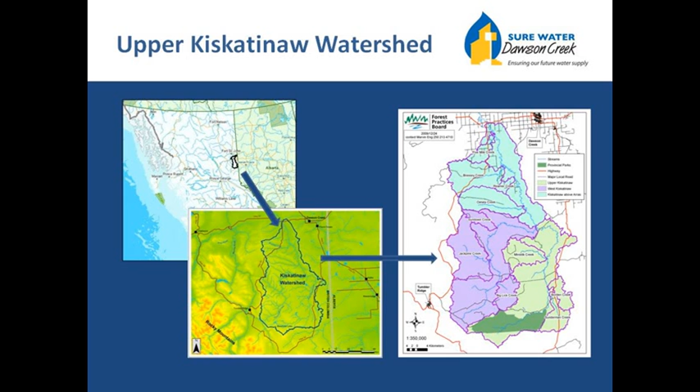The watershed is broken up into 3 key subbasins: the East Kiskatinaw River, the West Kiskatinaw River, and the Middle Kiskatinaw River. At its headwaters, we have Bear Hole Lake, which is a large protected area. From there, water flows through the East Kiskatinaw River system and eventually reaches the Arras Weir, approximately 170 kilometers downstream, from where we take water from the river through a series of stepped reservoirs and into the water treatment plant, which is a level 4 treatment to deal with any issues related to bacteria and parasites.

Once the water is treated and proceeds through the distribution system of the city, it ends up at the lagoon system near the airport, where it is further treated. And a unique initiative which has been brought on over the past several years is development of a wastewater reclamation facility, a world-class facility to promote the use of wastewater for industrial purposes and other eventual public use purposes. Once the water is treated through that system, it will eventually be discharged back to the Pouce-Coupe River and into the Peace River.

The City of Dawson Creek has really taken on an interesting approach to water management through an integrated approach. The Integrated Watershed Stewardship Program is an integrated water approach that brings in source water, treatment, distribution, waste treatment, and reclamation. When we look at the watershed component itself, we're emphasizing 3 components: community outreach, research and monitoring, planning and policy. This is done to ensure that the public is fully aware of how it can reduce its water footprint through conservation, engaging various industry and government partners in researching how water and land is being managed within the watershed, and also looking at broader policy and government regulations to ensure that we are protecting drinking water.

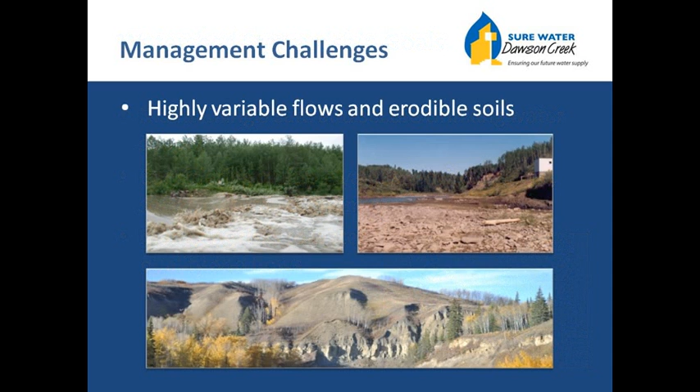So we deal with turbidity issues through improved land management practices, and there are plenty of safeguards to ensure that any wells or waste developments within the watershed are carefully managed, protected, and monitored.

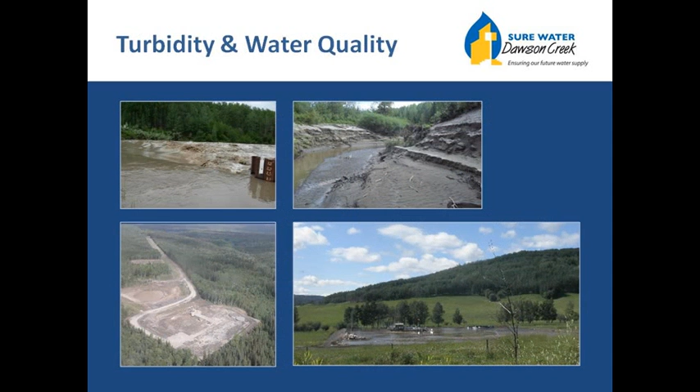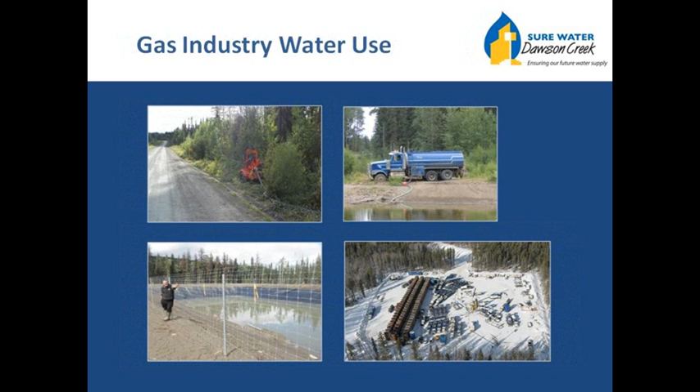So we continue to have a role in overseeing the monitoring of that activity. As we've seen over the years, the gas industry has had a significant demand for water, but in fact, reports are showing that it represents a very tiny fraction of use of the available basin flows, and in fact is decreasing over the years. So we continue to look at all water users and land management in an integrated approach to ensure that we understand the limits of our water resources and how we can continue to manage for improved water supply and quality.

So going forward into the future, we want to build on our efforts to maintain water conservation and source water protection, put more effort into classifying and protecting groundwater or aquifer supplies, studying and protecting wetlands, which we know are really important for storage during periods of drought. Establishing a formal watershed advisory body will help us to coordinate our efforts among water resource users and various industry partners. Through designation of the watershed, we believe we can have a greater focus on implementing our source water protection plan.

And finally, during periods of low flow or drought, as we've seen in 2011, the Bear Hole Lake water supply is proving to be a very reliable source, which we will need to continue to manage and ensure its sustained use. So Kevin, that's an overview of the watershed program. Let's hear more about how we can continue to maintain our water supply through various options.

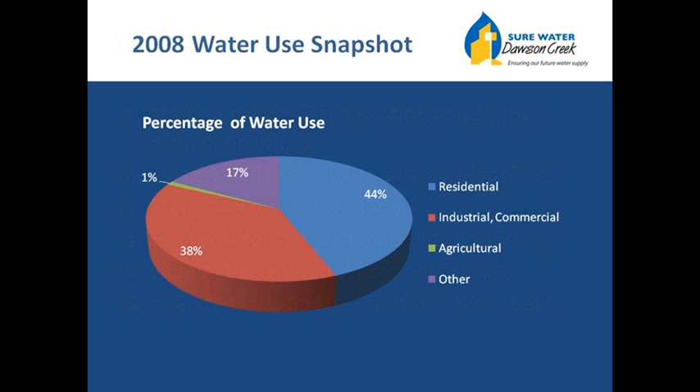These options have been studied over the years, with the majority of efforts focused on increasing our storage capacity by building more water reservoirs. However, more recently, a group of local citizens proposed a new water pipeline to Council, and Council felt the idea had some merit. And as a result, it was decided with the group that this information would be shared with the community in a public forum that looked at all the options.

Before making decisions regarding these costly enhancements, Council and staff want to know how water users feel about the existing options and other alternatives. Hence our campaign today to provide you with the information about these options and find out your preference. Please note that no action would be undertaken without community approval through a referendum or alternative approval process.

So here are the 4 options. Upgrading the existing water supply system as needed. Building a new raw water reservoir, tapping into groundwater aquifers, building a new water pipeline. We are also open to other ideas and options worth exploring. Now let's have a closer look at each one of these.

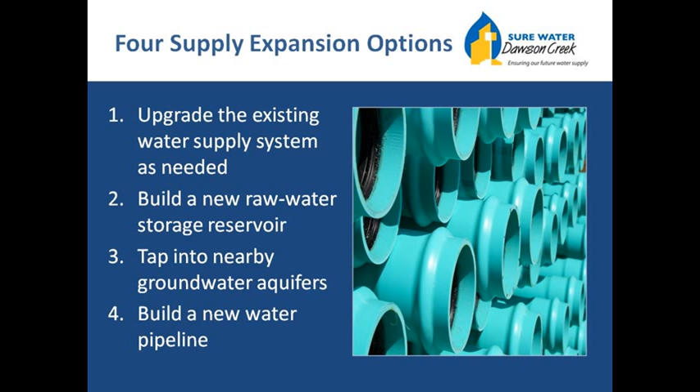For the purposes of the comparison, the next few slides provide a little more information about each one of these options. While we continue to make ongoing upgrades to our water system, the plan here is really to just keep doing that. Our existing system would meet the demands for a population of approximately 16,000 people with industrial usage such as fracking, or 20,000 without fracking use. And just to keep that in comparison, our existing population is approximately 12,000 people.

This will not reduce the impact of drought beyond what we have today, and the estimated investment is approximately $16 million over the next 20 years. The operational costs for this would be relatively low moving forward. So the question with this option is, do we continue to upgrade the existing system knowing that water restrictions might still be needed in times of drought?

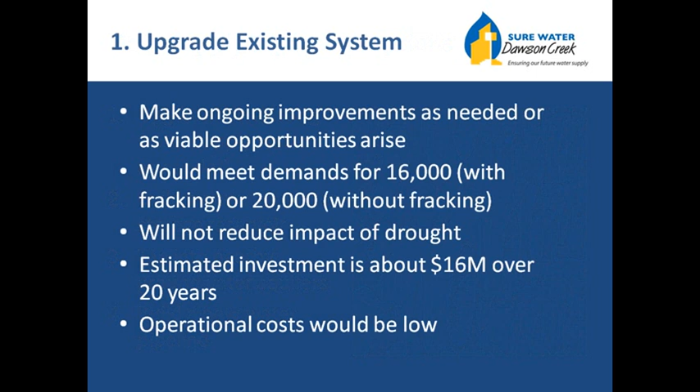Increasing our water storage by building a new water reservoir has been our focus over the past years and has been recommended in various studies about water as far back as the 1960s. The land purchase was approved by a previous council, and land was purchased in 2007, and a design began in 2012. But given more recent interest in a pipeline, it was felt that it was important to engage the community on which options would be better worth investigating.

So the question is, do we invest $22 million in a new water reservoir that will reduce the impacts of drought, but may not meet the future needs of the community?

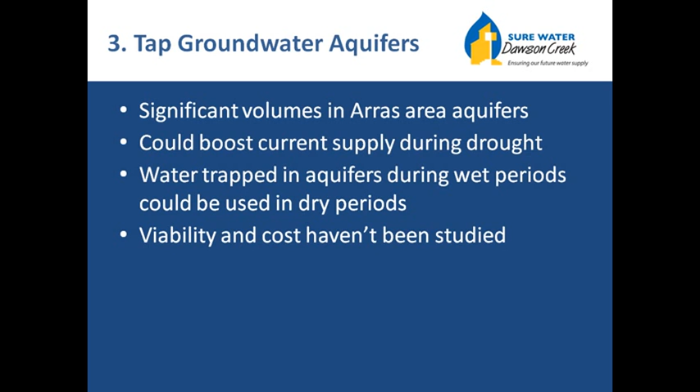The last option is to build a new pipeline from a different water source. This was presented to Council last fall. It includes the possibility of a pipeline from the Murray River to the Arras Reservoir or from the Peace River to the Trail Reservoir. Based on the information provided from the local group, this would address future water quality and supply until our population reaches about 26,000 people with industrial use or upwards of 32,000 without the industrial use.

This option would greatly reduce the water restrictions during drought, and the estimated cost for this project is $57 million, which does not include any operational expenses. It should be noted that back in 2003, the city did review this option, but at the time it was decided that it was too costly to pursue. So the question is, with this option, do we invest $57 million in a new water source that would minimize the impacts of drought and meet water demands for all uses into the future?

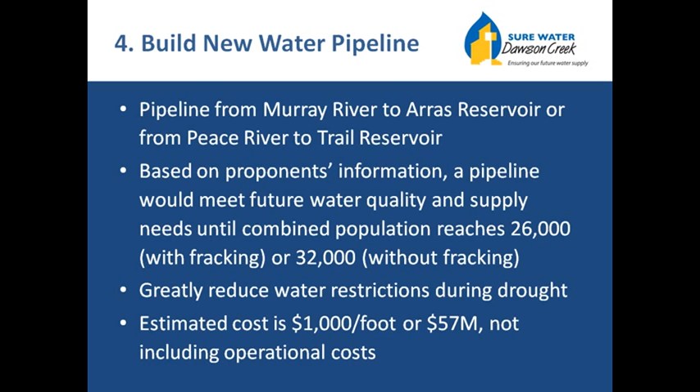Or do you have any other ideas we should consider, or a combination of ideas? We're happy to hear about that and would love to hear your comments on any options that you feel might be worth exploring.

Now, for any of these options, it's important to note that first, detailed costing would be needed to get a picture of the full costs associated with these options. And second, that public approval would be needed for borrowing the funds necessary to go through with these major options. This would happen by way of an alternative approval process or referendum.

That's why we wanted to get the conversation started, so we could help our community learn more about the challenges we face in ensuring the future of our water source. These are important community decisions, and we need your help to focus on what is important to you and our collective future.

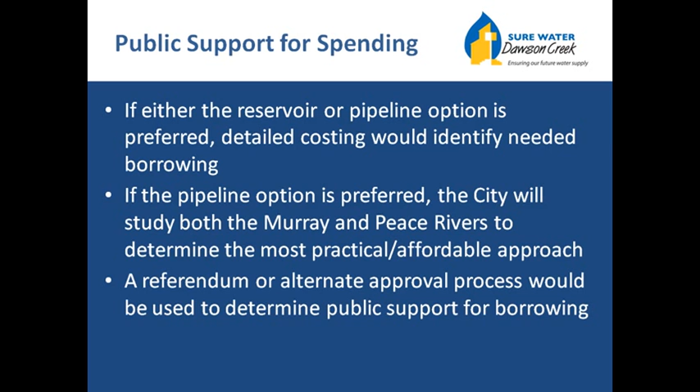So there are several ways you can learn more and give us your feedback. First, read our newsletter. It is being delivered by Canada Post to all homes in the city at the beginning of April. And if you didn't get one, you can pick one up at City Hall, the pool, or the library. The newsletter also includes a feedback form that you can complete and return to the specially marked boxes at the city, library, or pool, or you can mail it in or fax it back to us.

You can also visit our Water Forum page on our website. You'll find a copy of the newsletter, our frequently asked questions, as well as a link so you can fill in the feedback form online. You can sign up for our project update emails or send an email with your question or comment. Plus, you'll find background reports, previous studies, and information about our Community Water Security Forum.

Please plan to attend our open house and public meeting on April 24th at the Encana Event Center. There will be an open house from 4 till 9 p.m. where you can view displays, talk to staff, enjoy refreshments and conversation with friends, neighbors, and other community members. We are also holding a presentation similar to this one at 5 and again at 7 with time for questions and answers to follow. Plus, you can always stop by our booth at the Kiwanis Trade Show on the weekend of April 20th.